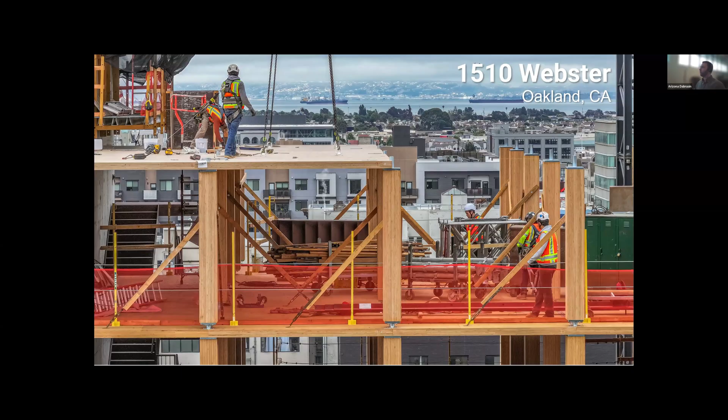I'm going to talk about 1510 Webster, which is a project that I think just recently finished construction in Oakland, California. You can kind of see the bay behind it. It's right there in downtown. It's a 19-story building. And before I move ahead on some of the other details, you can kind of see in this photo a unique mass timber structure that we'll be talking about a little bit more in depth, but it's point supported rather than having kind of like a column and beam system. And that will come into play with how we compared it to an equivalent concrete tower.

So as I mentioned, it's a 19-story building, a little over 150,000 square feet. It was the first Type 4A building in the United States utilizing the tall mass timber building code and in a high seismic region. It is also the first building in the world with a structure comprised of point-supported mass plywood panels. So as I mentioned, having a kind of two-way point-supported system makes it a little bit more comparable to the flat plate concrete systems we often see in towers of this size.

The top 16 stories of this building are mass timber, and then we have a 2-story concrete podium and 1-story concrete basement underneath this. The reason the project team ended up going this route was partially due to sustainability concerns and reducing embodied carbon, but in large part due to the fact that the mass timber system allowed for a much faster construction schedule and huge cost savings, $30 million in total when compared to the equivalent concrete buildings that they priced. That was equivalent to about a $20 per square foot savings in just structure, going from $70 per square foot to 50.

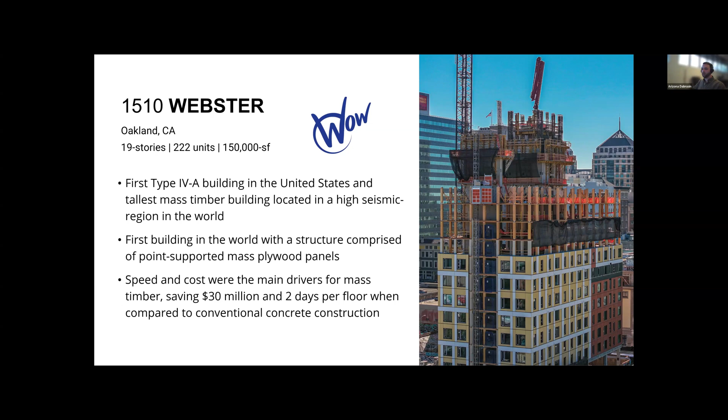So when we did the whole building LCA study for this, we were kind of partnering with WoodWorks, and we had the system which was constructed, which is the mass timber design that you're looking at now. And then we compared it to the exact same floor plan, elevation, size, height, but as a concrete building with post-tension slabs. So in order to make a lot of this work and realize all of the cost savings, this project did have to go through extensive testing on that mass plywood system, which I will dive into more in a second. But we have mass plywood columns, mass plywood floor panels. There are still concrete core walls and concrete podium, and then mat foundations in the basement and at level 1. So there's kind of a transfer level here at level 3, where we switch from that mass timber system to concrete below.

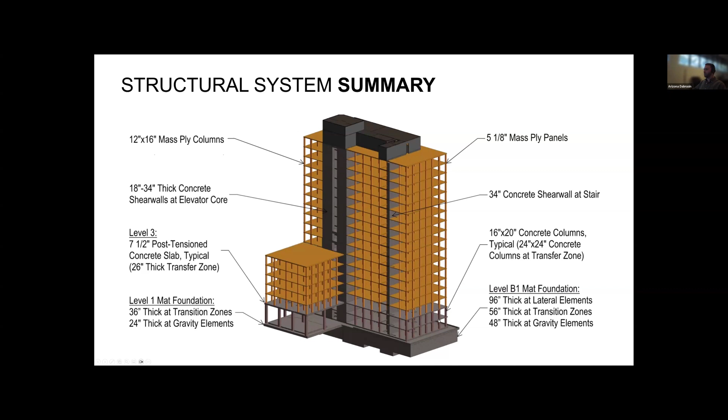So one of the challenges when we were doing this to make sure everything was costing out and also as sustainable as possible, was there was a lot of upfront structural testing, since this was kind of a new system, and getting this to be as efficient as possible. So we worked with Freres, who supplied the mass plywood panel technology and products, and we were able to expand the column grids in the mass timber system from a 10 by 10 foot grid to a 12 by 15 foot grid. The reason we were able to accomplish this was we had concerns about the punching shear capacity at those point supports, vibration criteria, and deflection. And through getting extra testing done, we were able to expand that column grid, which saved 47 columns per floor and drove us from a 7-ply panel to a 5-ply panel, which obviously had a big embodied carbon savings as well as cost savings.

And because this was tall mass timber and we still have a lot of fireproofing concerns, we had several layers of gypsum on the other side of this, and going from 7 inches to 5 inches, and then having that gypsum made the floor assembly thickness almost exactly the same as it would have been with a 7.5 inch concrete floor assembly. So as I said, the fire protection here, we had 3 layers of gypsum and a 1 3/8 inch effective char layer. That gypsum is thick and unfortunately is what we needed to meet those requirements, but you'll see when we dive into the LCA results how that kind of contributed to the embodied carbon of the structure.

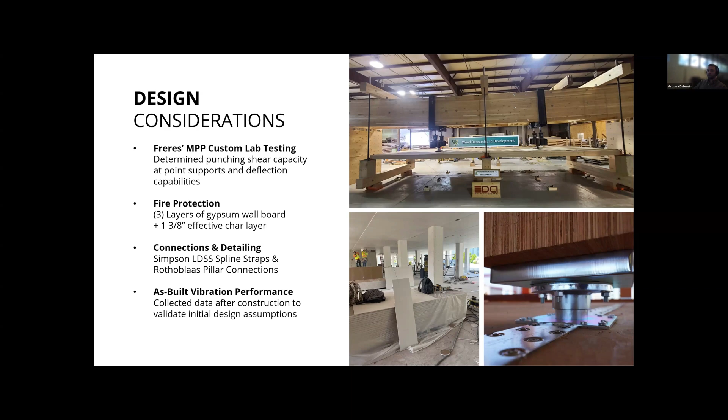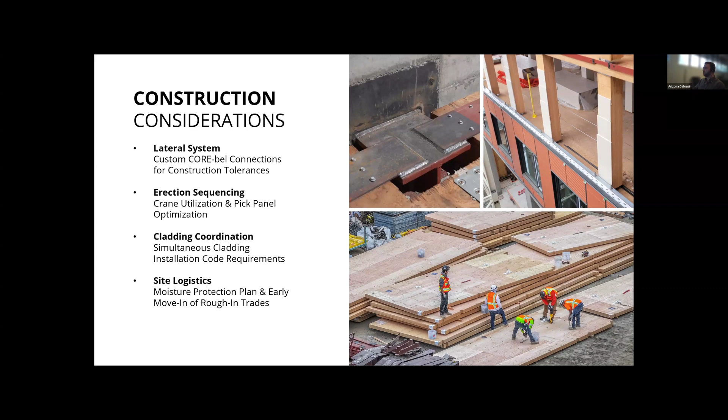So the erection sequencing and stuff, I also won't get into much, but it did allow for a lot of savings on the cladding as well. And in general, it was a very, very efficient sequencing. I don't know what the total construction savings on the mass timber versus the concrete was, but I know that it still went up an entire month faster than they even anticipated with the mass timber because of just the general efficiencies of all of this. So the project went really, really well, thankfully.

So here's a little bit of details on just the general construction types compared from the mass timber version of what it would have been as concrete, type 4A versus type 1A. And again, mass ply panel floors and columns versus post-tension concrete floors and concrete columns. And then in our analysis for the whole building life cycle assessment, we did look at structure and enclosure, and we used One Click LCA, and we looked at cradle to grave.

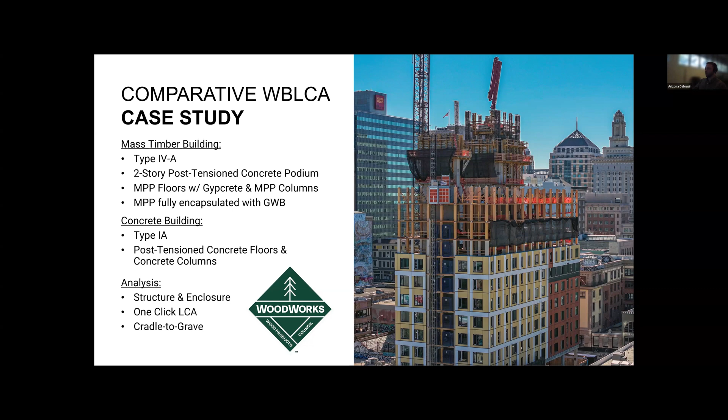This is that concrete version. Again, it's the same floor area, same height, slightly thicker foundations because of the added weight of those concrete elements, but also further spans between columns because we are using concrete. And we have a little bit more shear wall as well because of the higher loads on that system.

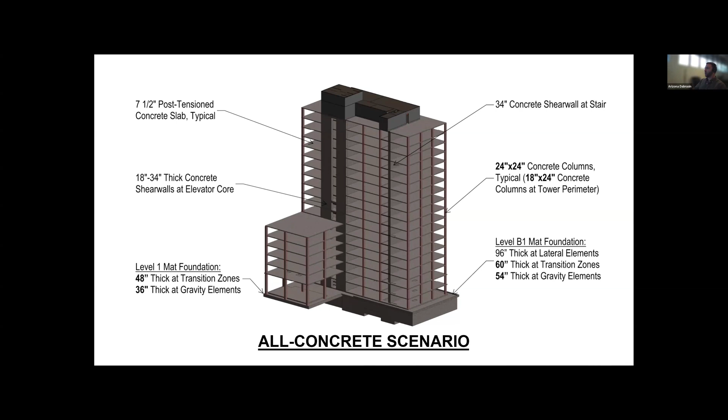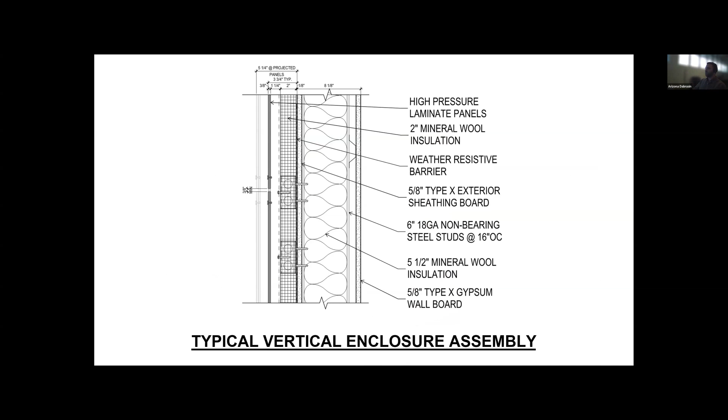This is kind of just a quick section view of what our enclosure looked like. We had light gauge steel, mineral wool, some high pressure laminate panels, but the vertical enclosure on both of these systems analyzed was the same. So we're really focused in on the structural differences between these LCAs.

So looking at this from a whole building perspective, including the concrete podium and the basement and everything, the mass timber scenario only really demonstrated a 5% decrease in embodied carbon versus the concrete system. While that number is smaller than we kind of hoped for, it's still a substantial amount of global warming potential. And the structure was 75% of the total impacts for both of those scenarios.

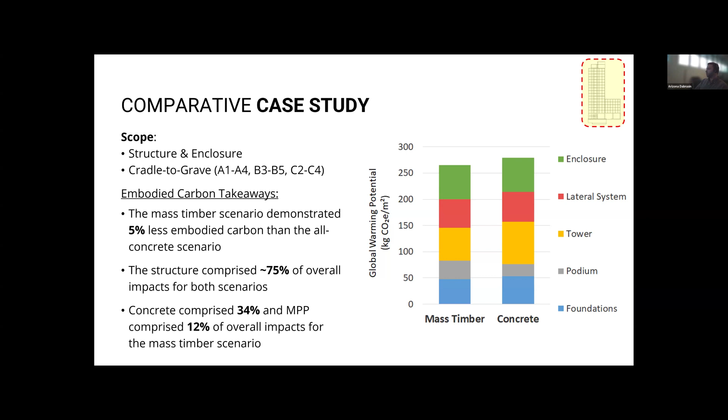Now, if we're comparing the mass timber portion above the podium to the concrete portion above the podium, we had a 16% decrease in embodied carbon from the mass timber versus the all concrete scenario. Looking at the mass timber scenario, 44% of that total embodied carbon was from the concrete shear walls. And then those 3 layers of gypsum board in the fireproofing were 17% of the total emissions of the entire mass timber tower portion.

So that definitely represented a significant chunk of those impacts, and something that when we're looking at lessons learned and things we can maybe do better in the future, depending on how code continues to evolve or gypsum board product data continues to evolve, maybe we can reduce some of that. But as you can see, we also have added acoustic mat and gypcrete in those assemblies for the mass timber version, which also had a decent contribution.

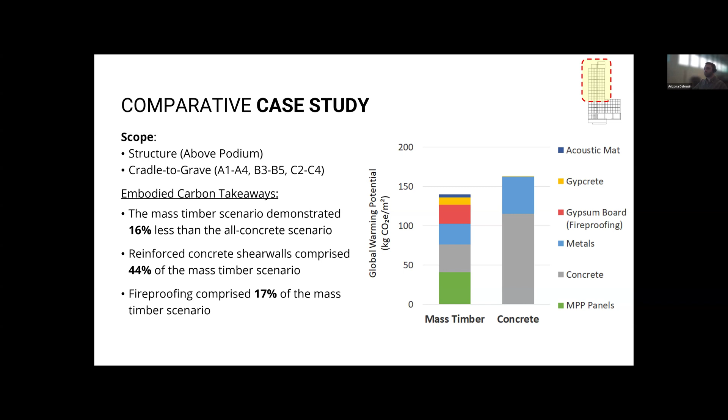If we're considering the biogenic carbon benefits over the in-service lifespan of that building, obviously we get significant storage from using mass timber. That would represent like a 63% reduction versus the all concrete scenario. Definitely when you're talking about biogenic carbon, there's various ways in which people feel that should be accounted. But if we're talking just the lifetime of the building and the benefits of locking that in during that lifespan, that is a significant amount of global warming potential there.

And then we did dive into some end of life studies as well, looking at the benefits of reusing that mass timber. We also looked at some of the assumptions that One Click LCA makes in terms of material transportation and material wastage. There is an assumption in One Click that all wood products, including mass timber, have a 16.7% material wastage. From our experience talking to the WoodWorks people and working on over 160 mass timber jobs up to this point, we felt like that number was really high. Mass timber is often prefabricated and brought to the site, and there's very, very little wastage there.

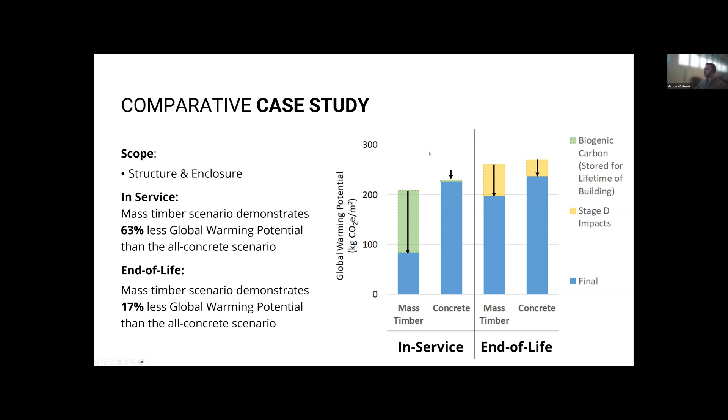So while we left those assumptions for the initial analysis, when diving in a little bit deeper and adjusting that, as well as decreasing the concrete transportation distance, which was assumed by One Click to be 130 miles, to 15, since we knew where the supplier was and that transportation distance was a lot shorter, we were able to reduce the end of life and include some of those stage D impacts. And that had an effect of making it another 17% lower versus the all concrete scenario. But again, we adjusted some of those concrete values as well, so you can see a reduction in the all concrete scenario impacts as well. So those are the added considerations that we took into effect on this and dug a little bit deeper.